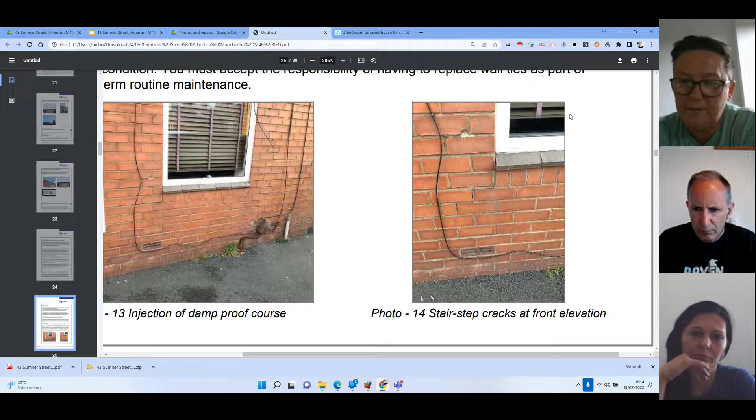Well, the surveyor is saying there's a step crack and it's an issue, but he's not saying it's a red alert, he's just saying it's here. That's why I'm not too worried about it. So it's a repointing thing, and then just watch it and periodically check it.

Okay, and then we have this. Now here's a question actually - for the rear of the property, it's got this cement render on it. What sort of condition is that in?

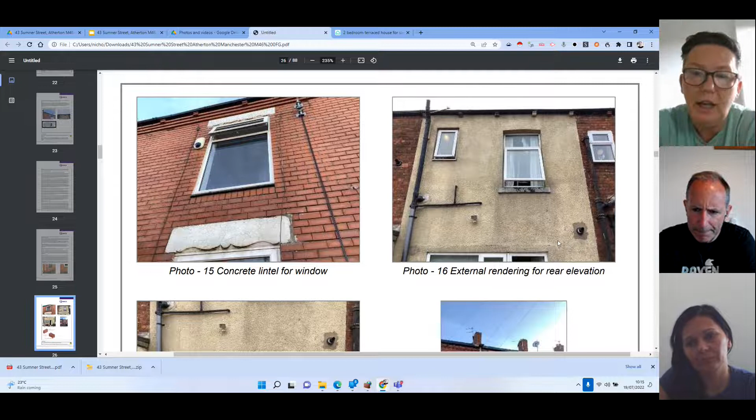So just as a disclaimer, we couldn't get into the back of the property when we visited. I had to go with the estate agent, and there was no back door keys. I still don't have those back door keys, apparently they're in the property. I now have front door keys, but we couldn't get in the back, we couldn't access the gate at the back. So I've not been able to view the back of this property properly at all.

All right, well you will be going back there again, assuming the client wants you to work on this. So, but I think based on your depth of experience with these things, if there are some cracks in the cement render, what would you do with that? Would you try and seal it or just leave it alone?

Generally we just try and seal it. Cracks in render can be a problem because if there's anything going on with the bricks behind, water gets in and then it seeps everywhere, you know, it's just not great. So we'll just fill them - we could either put a silicone in there just to prevent water ingress, or we can repoint it, just fill it basically.

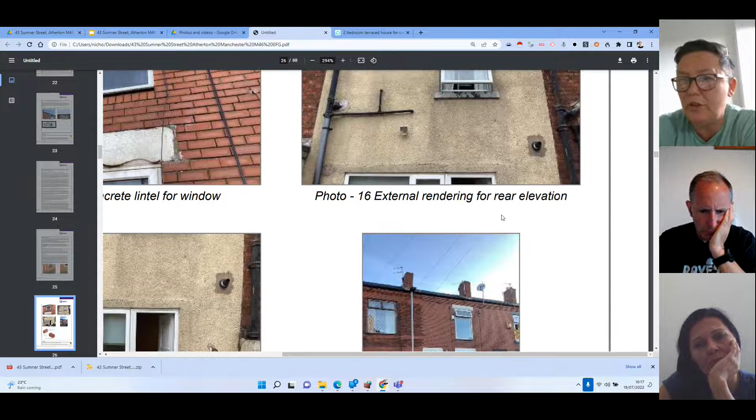Okay, so as a general thing to do, is it worth sealing and repainting this exterior wall? So paint it with some... you can get a sealant that gives it a nice protective layer, so when you put the paint over, it's more watertight than what it would be right now.

Okay, so as a potential option, and again we're looking at these because you couldn't get into the rear of the property - this is a potential task, which is to put some kind of heavy duty exterior weatherproofing sealant, maybe a magnolia or white color, and that would also then seal up all the cracks as well. So then you've got a protective layer which will last minimum 10 years, and then you can forget about the issue, as it were. Is that something worth considering as a task?

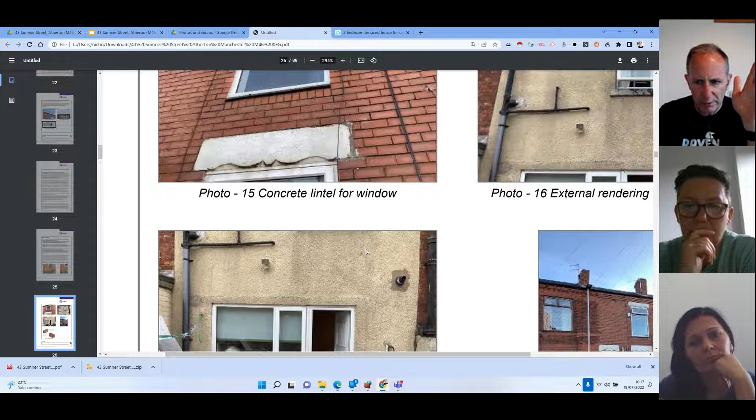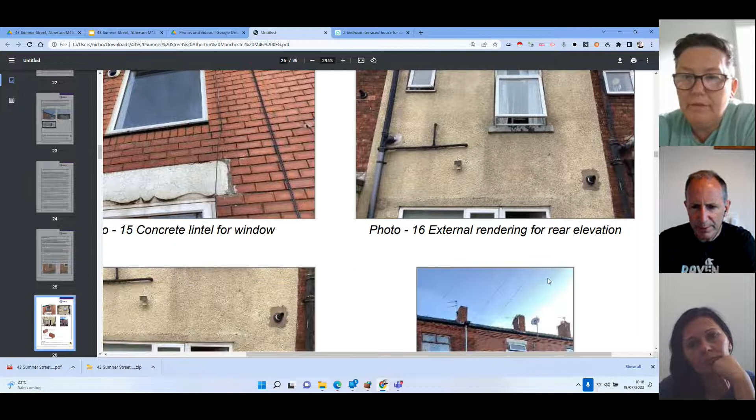Yeah, definitely, definitely. I mean, it's looking quite tatty as well, isn't it? That's why I'm thinking if you just get on and just paint the whole lot, then it's done and you don't have to think about it again for a long time.

Okay, so we got that, and then we've got some double glazing here - that all kind of looks okay. Is this door either very small, or is it a UPVC door, do you know? It's a UPVC door, but again, I've not been able to open it. Well, we assume it'll open with a key. Yeah, it looks like a normal size door. All right, so that's that.

And then the next question is - right, so we've got some pictures, we'll just zoom into these anyway, just for the sake of it. Now, one of the problems with these survey pictures is the resolution is always terrible, so it's difficult to really judge what's going on.

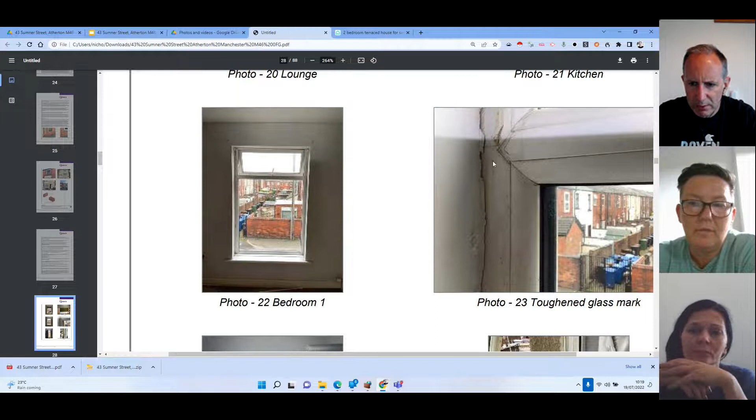And therefore relying on pictures from Mandy. So here's a good example of something we'll talk about later, which is sealing up the windows properly so that there's no water ingress.

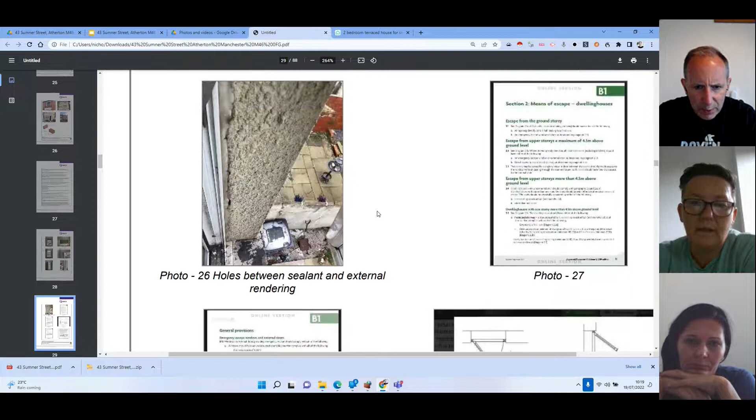I'm quite curious to see pictures of the backyard. There is a picture of the backyard, but let's see if we can find something more helpful. All right, there's our door. It's probably, if it's UPVC, it's probably okay. So it's just a question of making sure it's all sealed in properly, presumably. Yeah, okay.

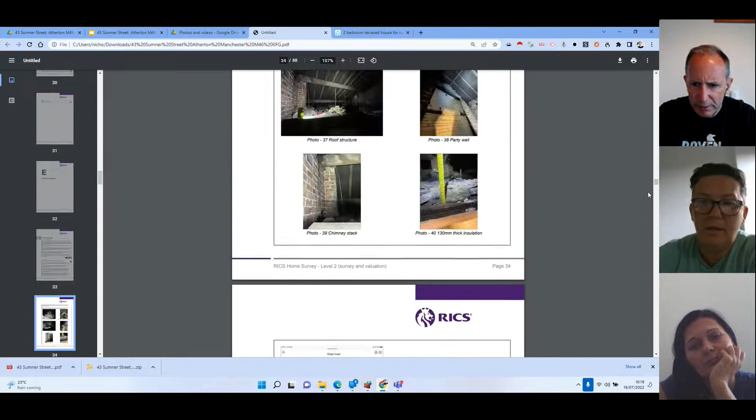And what I really want to see is the rear yard. Once we have a look at that, then let's get into the loft space issue. All right, so we talked that through, so we know what that means.

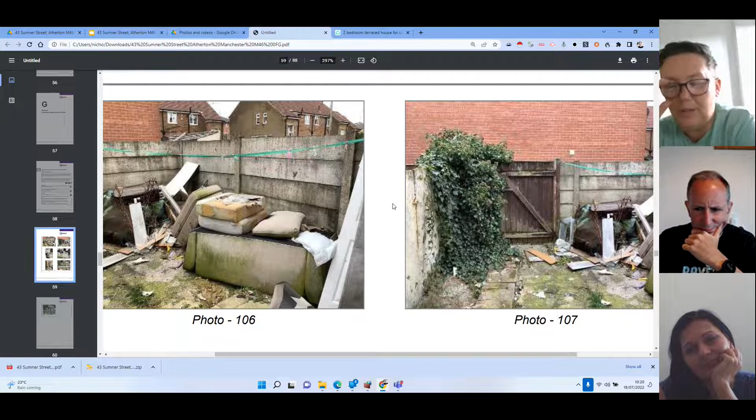It's really messy in the backyard. So did you see into the backyard? I presume you did. So what's going on there? Well, there's still a lot of rubbish in the backyard. That's still there. Yeah, so all that's still there. The backyard is really, really quite bad. And there's a lot of rubbish underneath the stairs inside the property.

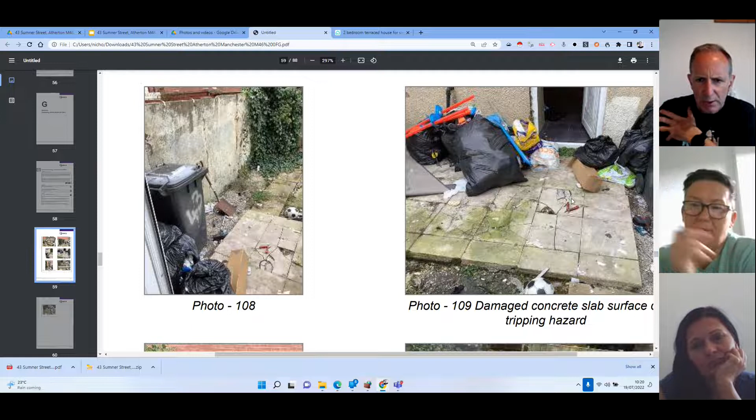Okay, and these paving slabs, a lot of these need replacing. If we just start with the house end and work our way through. So the first thing is this paved area. Do you think it needs to be taken up and replaced? It looks like it does.

It's awful. I always think about if somebody moves into that property with kids, look at the state of them. It's an accident waiting to happen. And it is, you know.

Yeah, and there's a legal obligation on the part of the landlord to provide safe and comfortable housing. So safe means no trip hazards like this.

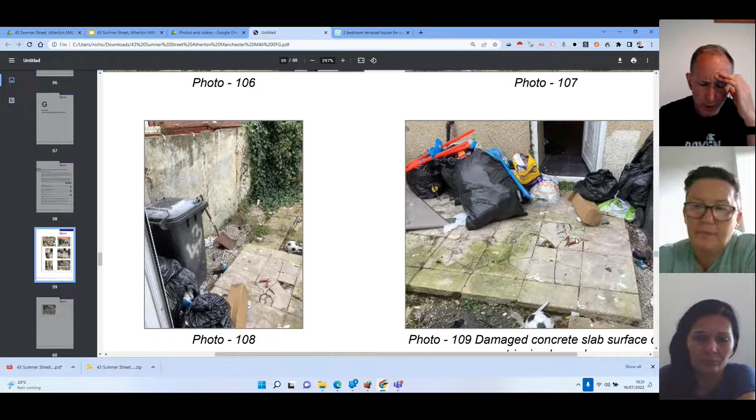Okay, so just to give us an idea, Andy, let's talk about this paving area for a few minutes. Tell us, what would you do with it? I'd take them up straight away. I think what we need to do is take them up. And then if you look at the subfloor underneath, that's not great either.

Okay, so the option is take them up and reflag the whole area. Because it's going to need a new gate as well, I think, because the gate's a bit worse for wear.

Okay, well just dwelling on this, what sort of general cost implication will there be? Is there a cost per square meter number that you know about for this kind of work? We'd have to measure it up. Off the top of my head, I couldn't even begin to tell you because the fluctuation in materials at the minute is ridiculous. You could say one thing one week, and the next week it's completely different.

So what I would do is, when I can get access to this back garden, measure it properly and get prices on materials. You just get a proper figure, because I don't like to bang things out off the top of my head for this at all. I understand.

So actually, today is about gathering requirements, not putting numbers together, because that's what the next phase in the process is all about. The next phase is the numbers.

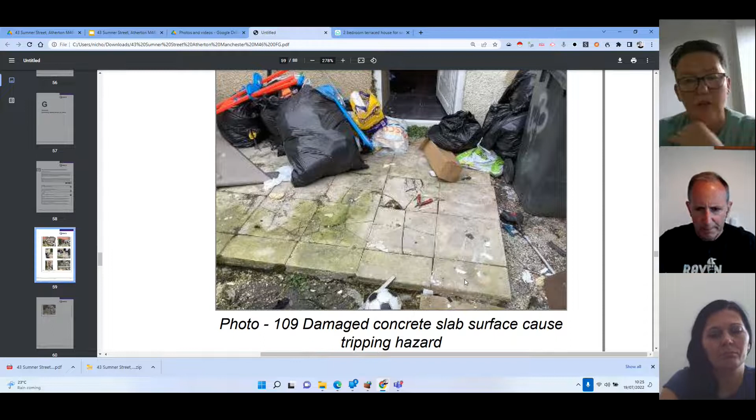I'd probably flag it if I'm honest, I think it'll just look far better. I'm with you on this, but for another reason, and that is if you ever have to get underneath this, if it's concrete you've got a problem. If it's flagstones, you can lift a stone up, start digging, and put it back. I don't think the subfloor is that great, to be honest, and to pour concrete on that, I think it's just not great, is it?

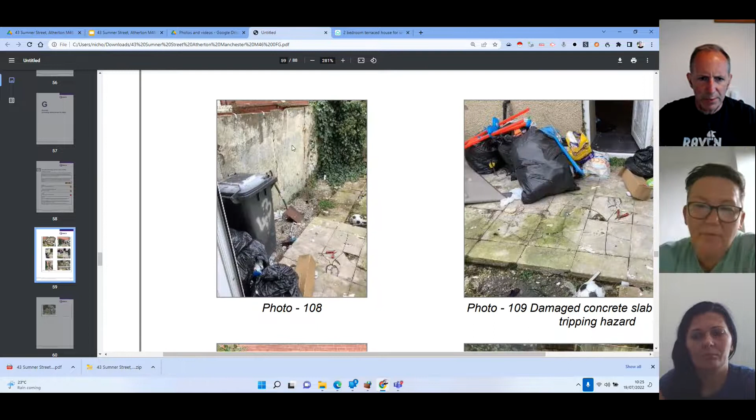Okay, so that's good. Now the next question is, we've got this wall here, and it's previously been painted. We've got some ivy and so on. What would you do with all of this?

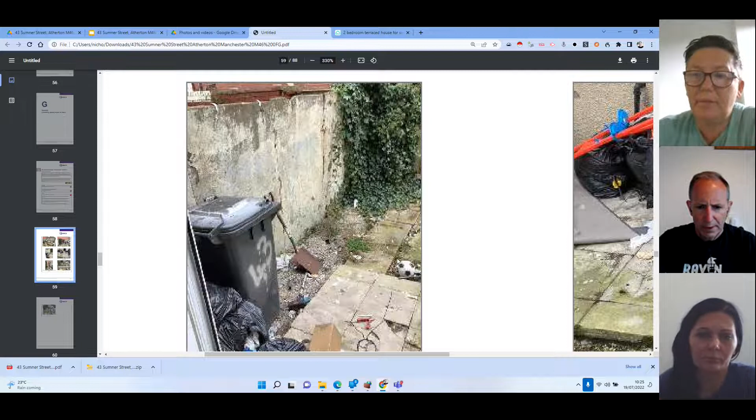I'd probably cut it all back and paint the walls. Depends if you like ivy or not, but I don't think it's doing anything beneficial there at all. So all of these concrete fence walls, I'd paint them white.

What would you paint them with? Is there some sort of special concrete paint, or do you just use a Weathershield masonry paint, which is quite watertight? Masonry paint is quite shower-proof quite quickly as well, so with the UK weather, if you get a little bit of rain, it's shower-proof quite quickly. So yeah, it's just masonry paint.

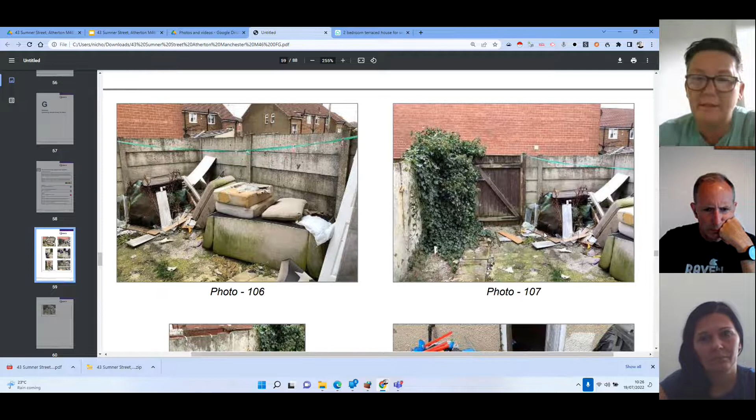Okay, cool. And also looking over, you can kind of see here there's something going on, some concrete or something. You've got paving slabs going out to the back, and we'll talk about the gate in a moment - those slabs need replacing as well. And you've got gravel edging, just tidy up, remove the weeds, and beautify it.

But something I'm not really clear about is this area here. You've got the paving slabs going out to the left, then this paved area, and then whatever is here - is that concrete or grass? It looks like concrete, like whatever's underneath the flags. I think it's where most of the flags are missing and broken, and whether they've had artificial grass down there, or whether they kept that space for a specific reason.

The problem I've got is I've not physically been able to go out in that back garden and have a proper look. But as you know, watching this, the game plan is we set requirements and go from there. So I'd suggest a requirement is obviously remove the rubbish, but another requirement is make good that whole area in the corner. And I suggest if you're doing one paved area and the paving slabs aren't too expensive, then pave the whole lot, and it's a problem solved forever.

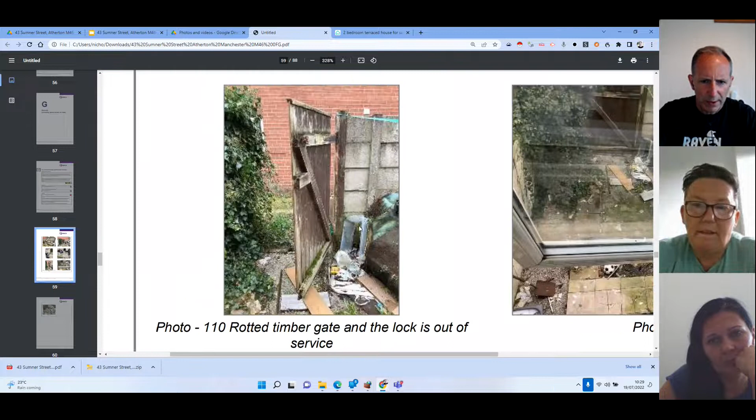Okay, so that's the requirement for that. And obviously now we're on to the next question, which is the gate. Let's see if we can get a better picture of the gate. Here it is. Yes, it's rotted. So new gate. Yes, definitely. Okay, all right.

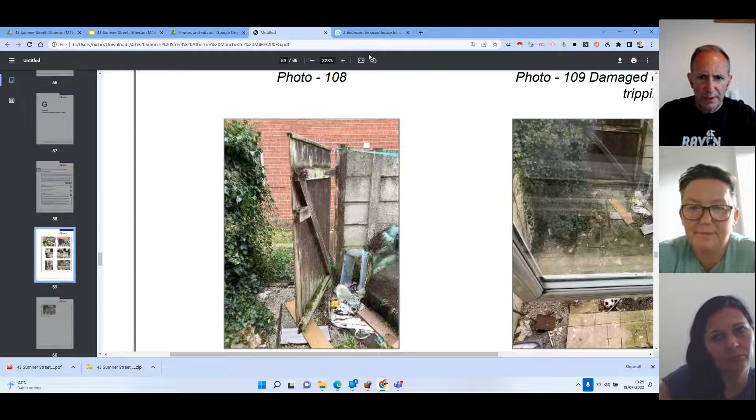That's good, now let's move on. There we've got a picture of the whole backyard. That's helpful, thank you Surveyor for doing that. All right, yeah, definitely the border, the paving slab in the area, that would be nice. And this, whatever they did here was just a fail because it's just goopy and yucky. Great, all right, and the bench as well, yeah, no that's great.

And then you have a little dining area outside. Paint that whole thing white, I think that would be a very nice area to be in. Get rid of the little ivy, you could put a two-seater, little white round table out there. You know, anybody can do whatever they want out there, can't they? But it just makes that rear area more appealing, especially if you've got kids as well. You want somewhere that the kids can go outside and play safely.

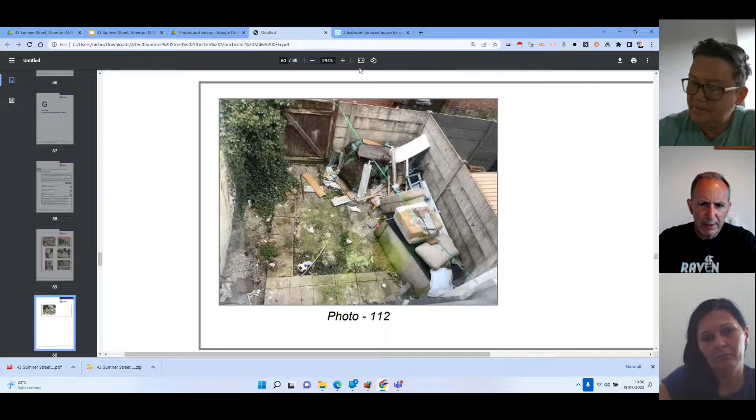And as a landlord, the reason you might want children is because when families settle down, they stay put, because the disruption in moving is too great and they just want a quiet life. It works really well, because the other option is you get young professionals, and on the face of it, sounds great. But the problem with young professionals is they're young, they're finding their way in life, they have disagreements, they break up or whatever, and so you just get a lot more churn. Families are wonderful because they stay put. So if you make a property family friendly, it's a good thing.

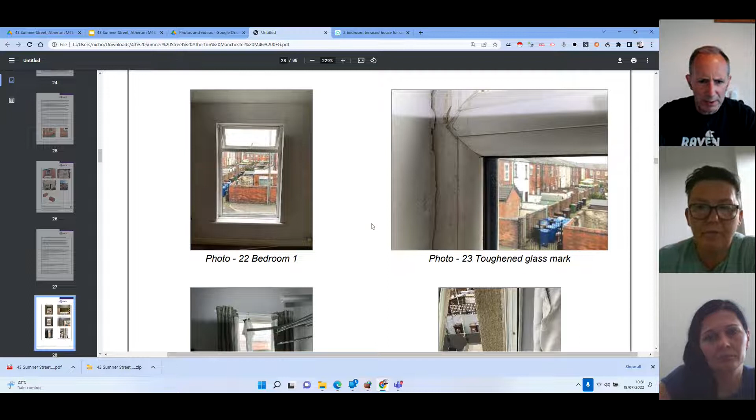Now, okay, let's deal with all of the window frame stuff shortly. We'll just have a look at the loft area because I think we need to cover that off. And then we get into your photographs, Mandy.

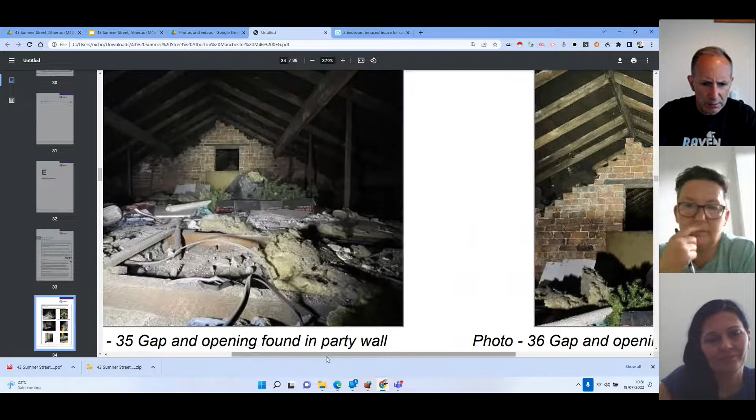All right, well that's a mess, to say the least. So what would you do about this, Mandy? Well, a minimum of insulation you should have, I think it's about 270 mil, but actually it could be even thicker than that - really you should have about 330 in there. But you can get away with 270.

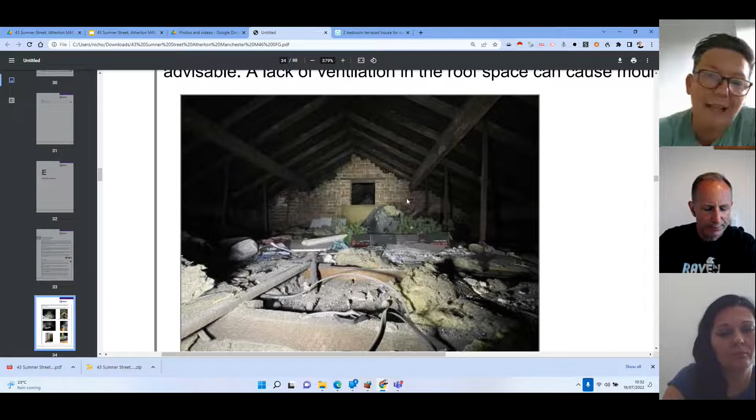But again, you can see the party wall there - the reason these are bricked up properly is to prevent fire from spreading from property to property. And that doesn't look great. The state of that insulation in there, it's kind of non-existent. I don't know what's going on in there at all.

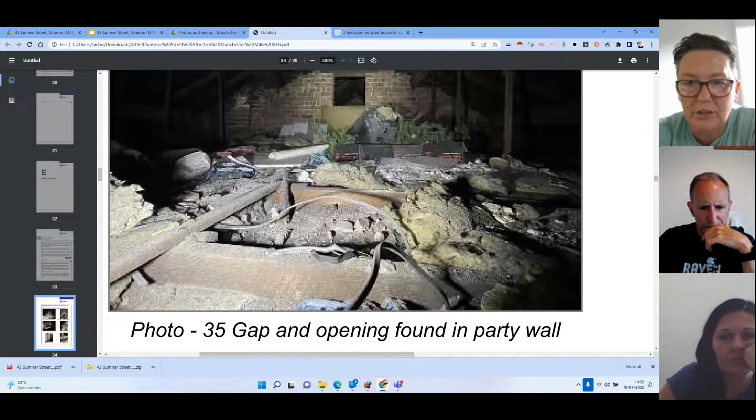I'd start again. Okay, so the requirement is to take out the existing insulation, remove all the dust and mess in there. So presumably for that kind of work you would have a big industrial vacuum cleaner - is that how you do it? You pull out all this stuff, bag up the insulation, but everything left over, the dust and dirt.

Do you then vacuum that up? Is that how you do it? Because it is a messy job, this, to be honest.

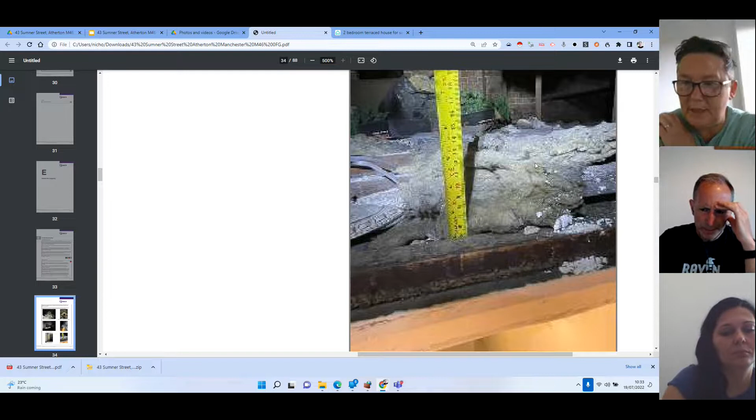It's not one I particularly like doing, but I'll send somebody else up there. It's because you're the boss, Mandy. Because I'm the boss. But yeah, we won't say it like that. I would if I needed to, you know, to take one for the team.

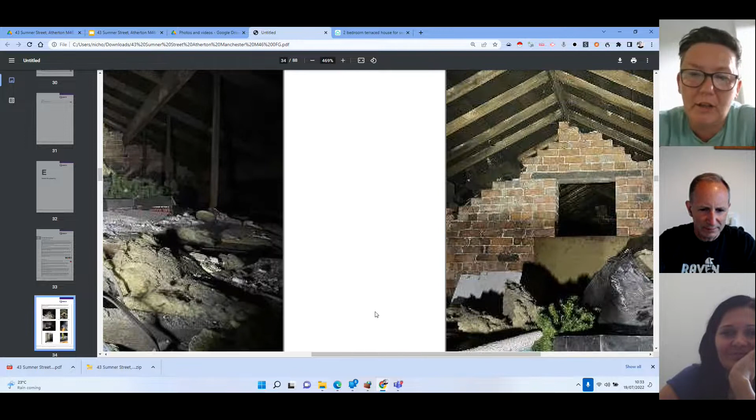But there you go, you'd bag all this up, get it all, because the fibres from this stuff are just horrendous. It's not great. So you get all that bagged up, and then we just get an industrial hoover up there, hoover up all the excess dust, etc, so the house isn't getting covered in it either. It's such an important job, it's one of those things people don't touch for like 100 years, and you look at the state of the soot and that.

Yeah, it's awful. So anyway, the other thing to say about this is that the tenant won't even know, and arguably you'd say, well, how's that going to improve my rent? Well, they will store stuff up in there.

So one of the other things you might do, because it's a small house, is maybe board it out a little bit, and then people can store a few things up there, perhaps. I don't know, what about this?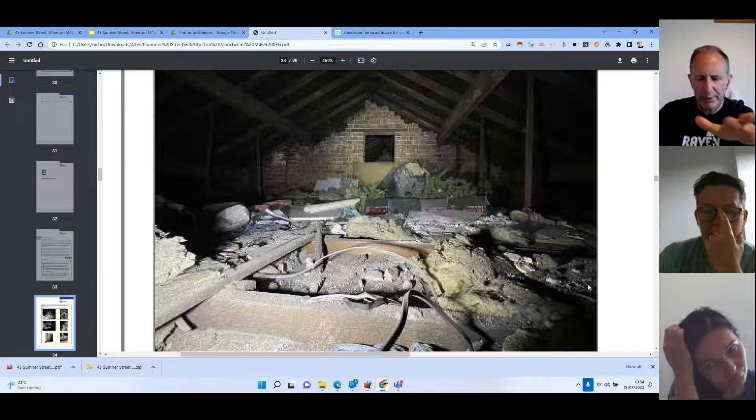So just to set the requirements, and also dear client for you watching, the way it works is we set lots of requirements, we put it all on a spreadsheet, and then we begin the back and forth where it's like, do we really want this? Let's not do that, or let's do a cheaper version, or whatever the thing is. And we work out what the minimum viable, optimal choices are, and that equals an end result and an end cost.

So with all of this, it's pull out the rock wool or whatever the insulation, clean everything and reinstall. And then do we add in a thing about boarding out a little area around the loft hatch? You could do.

What people tend to do is they get on a set of step ladders and they push it in, try and push it as far as they can, to store. But if you board around this, it's just easy, isn't it?

People don't tend to get into lofts, they don't climb in, they'll just push things in. But whoever's pushed this in, is that a Christmas tree at the back? Yes, right at the back.

This highlights another point, that if you've got tenants gingerly stepping along the rafters, they're going to fall through. And then you've got a real problem because as a landlord you've got to sort this out, and that's just not cool. So it's probably a good idea to board it out, insulate, and then board out.

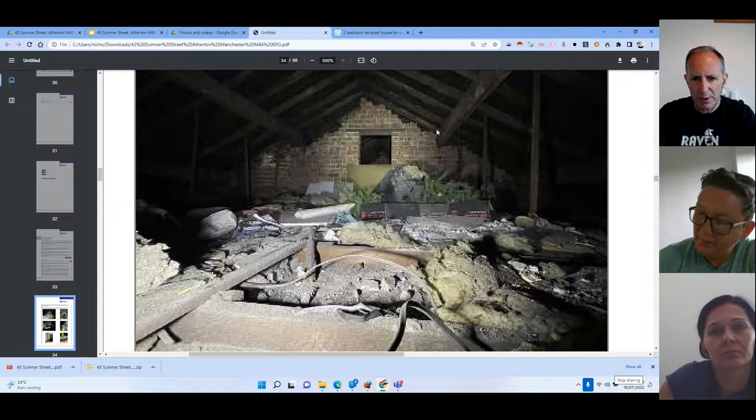Now we're on to the next question, which is this party wall. What do you think, Mandy?

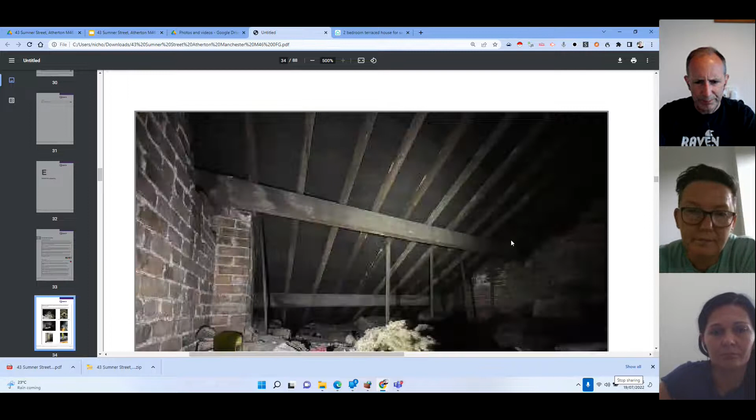I have been in a few properties that are like this. The survey will say this needs to be done because it's a fire hazard. If next door had a fire, it's to prevent the spread of fire. It needs bricking up. That access there, you can access next door's roof.

So we've got two issues, a security risk and a fire risk. So if we deal with the security risk first, one of the problems is that you're trying to get something quite big in through a small hatch. So the loft hatch, do you remember how big it was?

It's not very big. Is it big enough? It must be big enough by definition to get this Christmas tree into the loft, and stuff like a loft ladder. But it's not like a massive opening like you'd have if you had loft stairs.

So where I'm going with this is, what if you didn't actually put bricks up there and do the bricking up, but got strips of plasterboard, patches, cut so it is as big as it can possibly be to get through the loft hatch. Then, being fire retardant plasterboard, fix it onto the brick wall so that you've got a seal, and you've got some security and a fire seal, and it didn't cost too much to do.

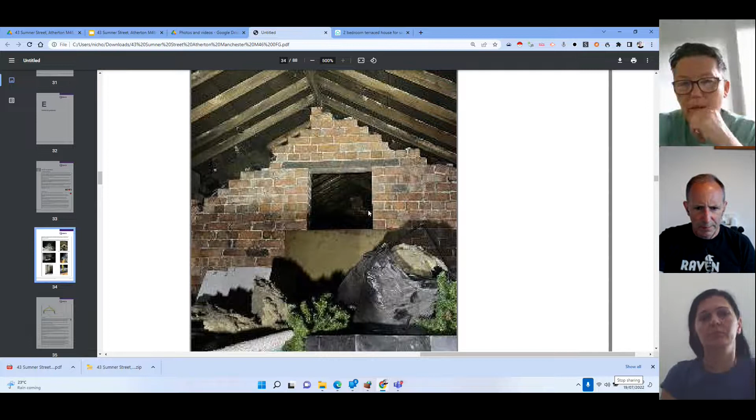And it shouldn't cost that much to do. It looks like there's some board at the back there going on, to be fair, so I don't know if this has been fixed to it previously and it's dropped off, or something of that nature. So are we saying that is the solution, Mandy, or have you got another idea? I would do that, because then we're dealing with it from our side of the property and not their side.

Okay, so let's say it's fire retardant plasterboard, and I think from memory there are different grades of plasterboard, so you can get like half hour fire retardant plasterboard. Is that right? Yeah, you can get fire retardant plasterboard, you can get marine board, aqua board - if you're boarding out shower rooms and stuff, that's water resistant. So yeah, there's lots of different types, acoustic board too. There's all kinds of different plasterboard you can get, but yeah, fire retardant would definitely be the one we'd use up there.

It probably takes, my guess is it would be 2 sheets of plasterboard, strip cut into sections. And how would you fix it onto the wall? We could dot and dab it onto the wall, I think that would be the easiest option.

Yeah, dot and dab would be the easiest. And also it means that in a fire situation, if the dot and dab isn't going to go, that'll hold, won't it? As opposed to fixing it with screws or whatever, dot and dab has got the pressure more dispersed, which is a good thing, and it'll hold better.

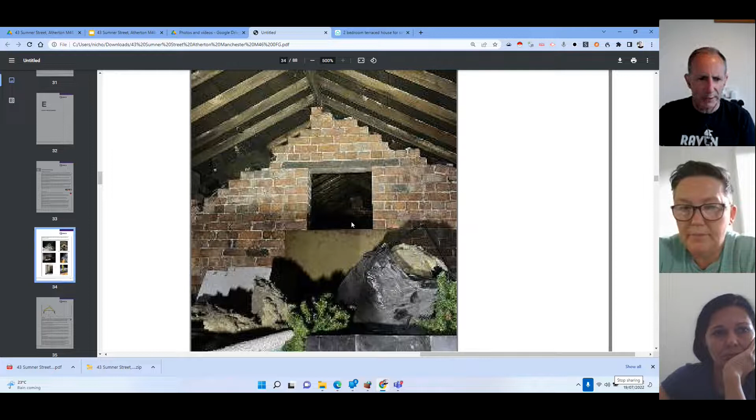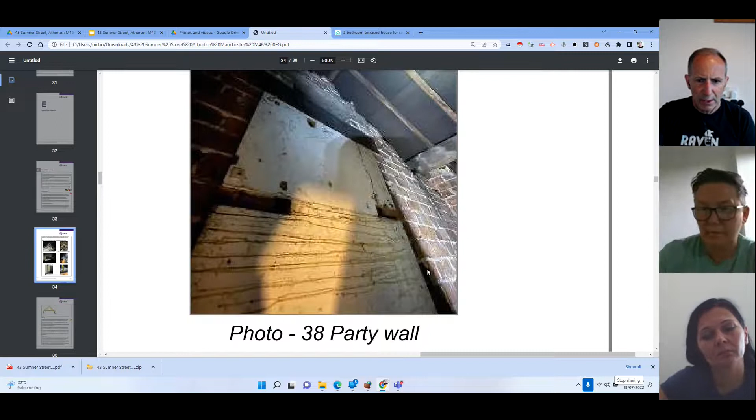Okay, great, so that's that. Right, we're all sorted on that front. Now, this is a relatively modern roof because it's got underfelt, that's a good thing, and therefore that's good. Now, any other comments about the roof itself?

Did you take - well, let's go into your stuff now. I didn't go in the loft, if I'm completely honest, I just went off what the survey had done.

Spiders are too big up there, Nick. I understand, but I understand. There's 3 different spiders that live in lofts as opposed to living in the rest of the house. Well, I have this opinion - I don't know if you ever watched Arachnophobia - that one of those lives up there, so I tend to try not to go up. My daughter is like, no, I get it. You know, sometimes you just have these things, and I have an issue with it, I don't know.

I'm sure I have a phobia of some sort, I just can't remember what it is right now. You have a phobia of the internet not working. Yeah, I do have phobias about not knowing things, and I just need to be in control of things. Otherwise things get... We would have never guessed.

Well, this is why we do these assessments, because we're being thorough and methodical, and we cover as much as we can, because then for you, the client, there's no surprise. It's just, here you are, we've got it covered, we know what's going on.

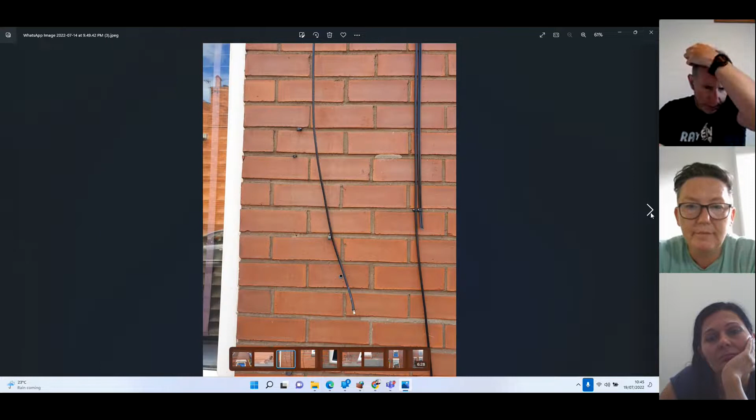Same story, tidy up wires, holes in places, and those are nice quality bricks actually. I have a thing about bricks, because if the bricks in a building are bad, the building is bad, because the bricks are the building, if that makes sense. And these are good bricks, so that's a good thing.

There's our little friend - hello old friend. That looks like an old stepped crack to me. So what we could do there is repoint it. I'd probably be more inclined - you can put, it's like a silicone, so it's what you use to damp proof basically. So we could make that crack slightly wider, get some silicone in there and then repoint it just to be sure, because there's a crack there right on that bottom brick as well. So I'd probably do that, just get it a bit more watertight, I think.

Yeah, and in the long term that helps because of freeze-thaw action and all that - you just keep the water out. But overall the pointing looks like it's in good condition generally speaking, which is a good thing. There's just bits and bobs, like I say, the holes at the bottom. And then here, I think there's a little bit of damp on the survey going on around this door area from inside, and this could definitely be the cause of it.

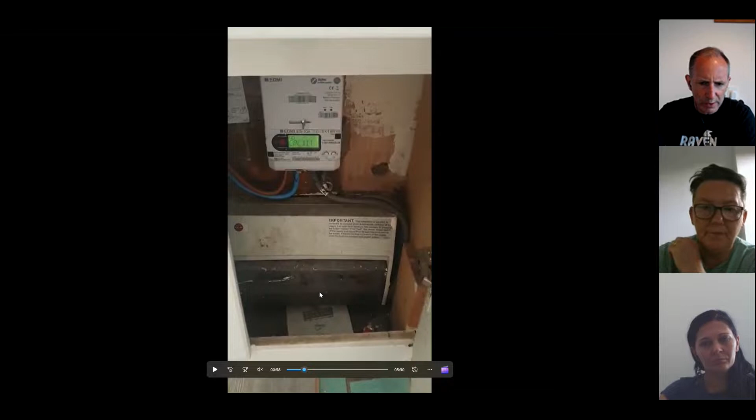Okay, and this circuit board, what is this? Is this old, how modern is this? Yeah, I think it's okay, I don't think it needs replacing. Again, we need to get an electricity check in there. I think it is okay - the reason I say that is because it's got a dark, semi-transparent door on it, and underneath I can just see little black marks, and they're kind of the same size as RCD breakers, so it's 1, 2, 3, etc. And that's encouraging, all right.

So I don't think we're going to need to rewire this house, which is a good thing. So I think there's an electricity supply, I just think there's a massive debt on the meter. Well, this takes us into an old chestnut about making sure that Andriana - it's a topic for later - but if you're selling the house on, make sure there's whatever. So what do you do about this issue, by the way?

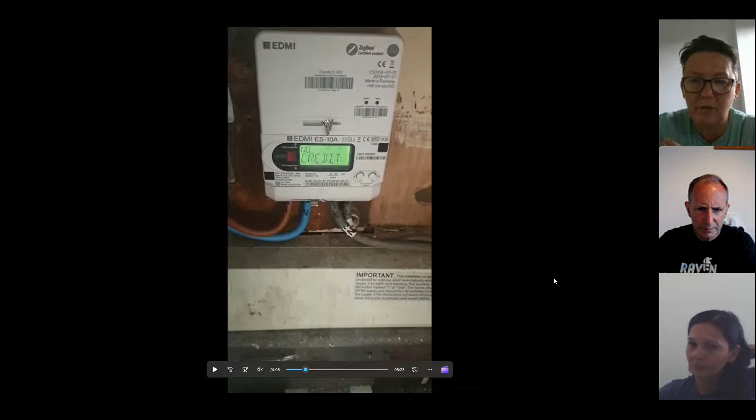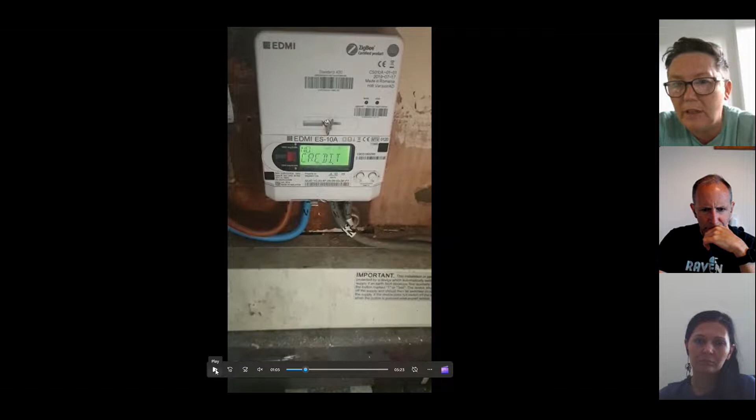I think whoever's bought the property, generally what would happen is the tenant would move in and they change the electric account over to their name. But whilst we're in there doing work, we need to have electricity on. So we need to find out who the supplier is, and find out where - because this looks like, is it a prepay? It doesn't even look like it's a prepayment meter. I mean, where would you put it? Usually there's an area where you can either put a card in or a key. Adriana, would you have a look around and do some research? We know what it is, EDMI ES-10A or whatever the thing is, and that'll tell us what it is, and then from there we can work our way back and work out how to deal with it. Okay, fine, so that's that.

Now, painting, as I said, painting and decorating throughout. That radiator, what's the deal with that? It just looks really yucky. Is that radiator - I'll just pause there. What's the story, has that been overpainted in the past? Because often people do that. It's just filthy, it's just dirty. Oh fine, so it just needs a good clean.

Okay, so one of the issues with radiators is that people paint them with vinyl eggshell or whatever, and then they get disgusting. They will originally be - what's the term, there's a special type of paint - it's not an epoxy resin, but it's a kind of resin-based paint, and you just give it a good clean. All right, fine, moving on.

Okay, this is a bit of a mess. Did you see anything that's howling? Or is this cupboard to the left - I think that's come off, so that needs to go back on. Yeah, that's the gas meter.

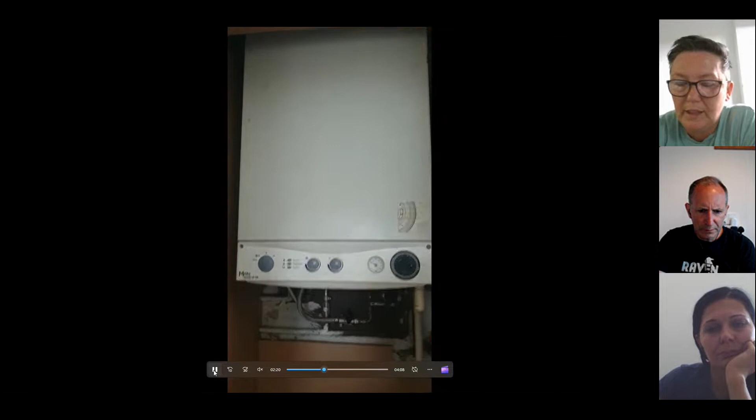And right, we've got that boiler - I don't know whether it's in good condition or not, it looks quite old. Yeah, that'll come with the gas check. So you'll do the gas check? Yeah, as part of your renovation service, you would get the electrical system and the gas system checked, and then we know about the boiler certificates. So how much is a new boiler if it needs one? It depends, it can range up to anywhere to £3,000, depending.

Okay, and we've got a fire alarm that probably needs replacing - I'd imagine it looks very old. Yeah. Okay, and we've got some rather tatty cupboards, but if they were cleaned up would they be adequate? They seem to be, yeah, they just need cleaning up. The tenant's not left it in a great - no, they haven't, have they? There's a bulb missing right there in one of the spotlights. And it's painting and decorating throughout the kitchen as well, I assume. Yeah.

Okay, nice backyard, lovely. I think it's very high priority to sort out the backyard, I think it'll really bring the property up. Now what's going on in there - would that be the double height fridge or something, I suppose? Okay, we've got a cupboard.

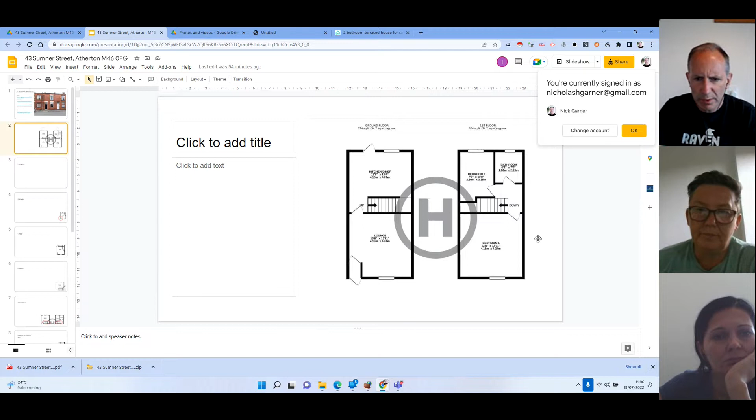This is the layout of the property. It's quite a useful thing to look at. Let's just zoom in a bit. Okay, I think we're kind of there. So this is all right, fine. So you have that area which you talked about.

So to recap, we have to paint and decorate this area here. Then we've got the lounge, which is laminate, yes. So we'd leave that and maybe try to get some beading that matches. And if not, at least white beading, which will match the skirting boards.

So option 1, matched. Option 2, matched with skirting board. But the floor is basically sound, so that's good. Then we've got doors and such. Are all the doors okay, by the way?

Yeah, seem pretty okay, they just all need repainting. Okay, cool. And now we're into the kitchen diner.

We've got, I can't remember, does it have gas or electric hob? I think it's gas, I can't remember off the top of my head. Gas isn't preferable, electric like induction is, but if we have to leave it, we leave it, kind of thing.

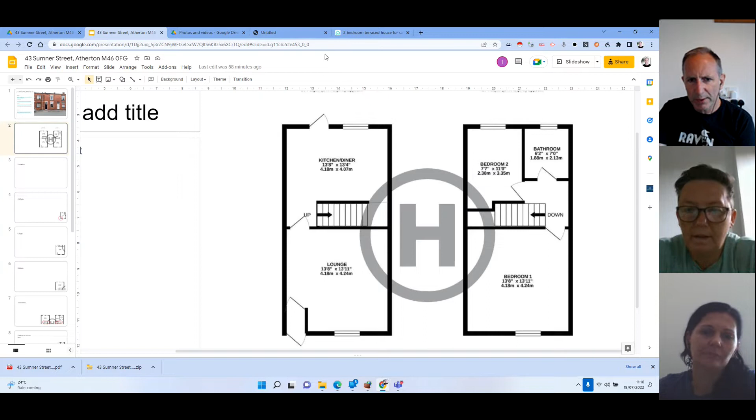And then we have the backyard: get the rubbish out, replace the back gate, paint, create a gravel border, and have paving slabs throughout the whole backyard except for the border area, the border being 500 mils thereabouts. And that's that so far.

Now, one other thing I want to double check on is the roof. I think the surveyor was okay about the roof - I don't think he mentioned any major issues with it. I always like to check all the gutters once we're at the property.

Obviously we're having some amazing weather at the minute, so when I get the lads on site, I like somebody to go up and make sure all the gutters are clean, because when we do start having bad weather, that always will present itself. So we will always check stuff like that.

And trying to work out which property we're on. That's 86, let's go back to this. For some reason it keeps bouncing me back.

I think this must be Sumner Street - yeah, it's not the cobbled street, Sumner, it's the one further along. So the house is the one that's not cobbled. Okay, yeah, so it's one of these. All right, I can't see the roof.

Just as a general observation with roofing, if the roofing is lots of different colors, it means the original roof was probably a bit suspect. So you can see on this street here, for example, the roofs vary a lot, but on this one it's all the same.